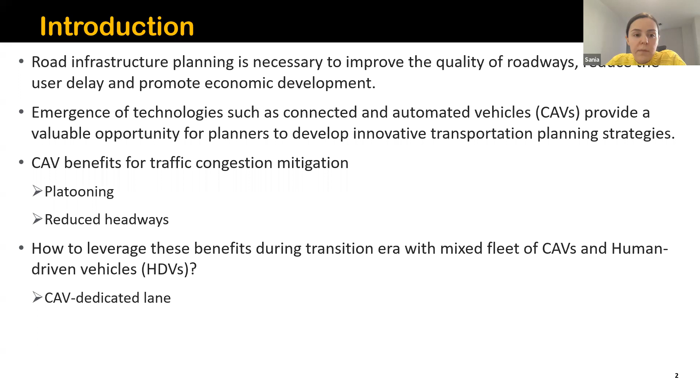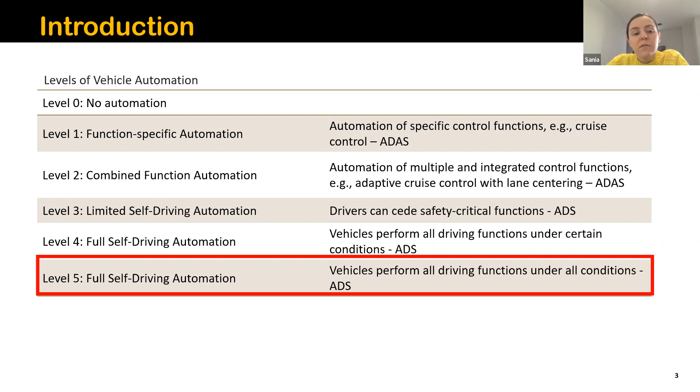According to the Society of Automotive Engineers, there are 6 levels of vehicle automation: level 0 with no automation to level 5 with full self-driving automation. The focus of this research is on the impact of CAVs on the design of transportation infrastructure, where there exist only HDVs and fully automated CAVs.

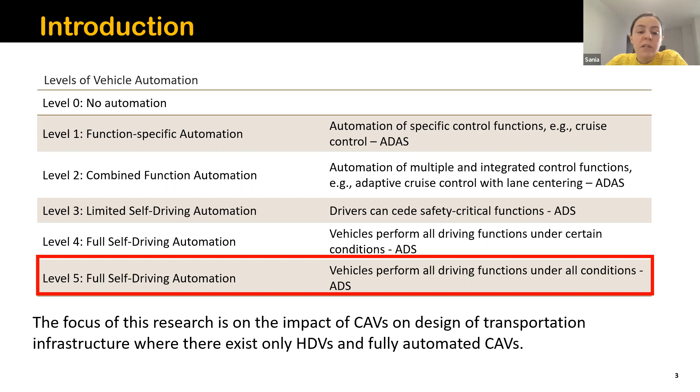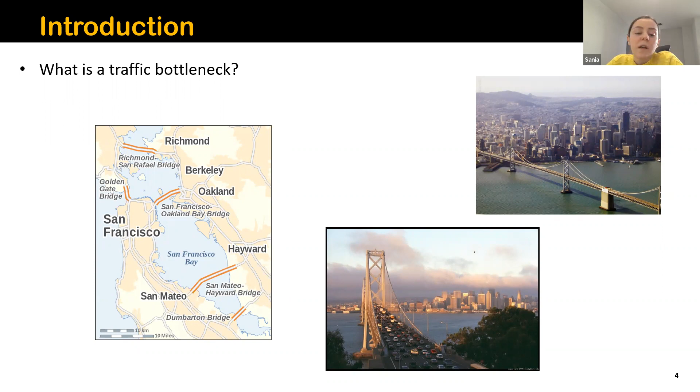So what is a traffic bottleneck? A traffic bottleneck is a localized disruption of vehicular traffic on a street, road, or highway. For example, at the San Francisco-Oakland Bay Bridge, people experience morning peak bottleneck congestion during the morning peak period as they travel from home to work.

This research aims to study the morning commute problem during the transition horizon with a mixed stream of CAVs and HDVs. In this problem, commuters pass a highway bottleneck during the morning peak period between a residential area and a workplace. The highway bottleneck includes multiple lanes categorized as CAV dedicated lanes, or CAVLs, and general purpose lanes, or GPLs. There are two groups of commuters: human driven vehicles, or HDVs, and connected and autonomous vehicles, or CAVs. The morning peak period is divided into T time intervals, and we are implementing a time-varying lane-specific tolling scheme during the morning peak period.

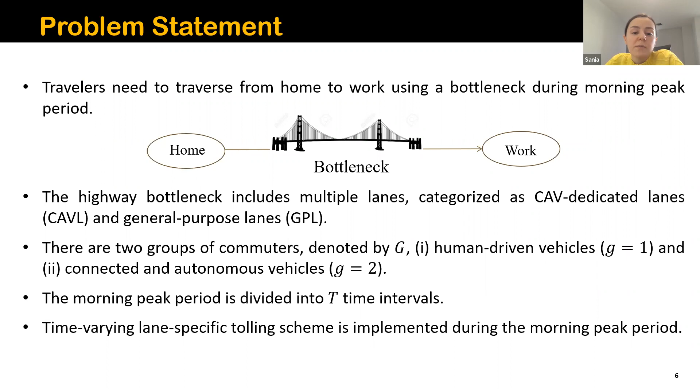So here is a list of research contributions.

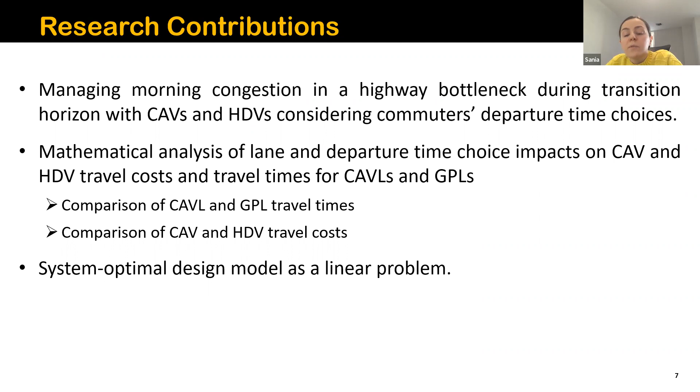First, the study aims to develop a framework for managing morning congestion in a highway bottleneck during the transition horizon with CAVs and HDVs, considering the commuters' departure time choices. We are mathematically analyzing lane and departure time choice impacts on CAV and HDV travel costs and travel times for CAV dedicated lanes and general purpose lanes. Finally, we have developed a system optimal design model as a linear problem to minimize the total system cost.

Here is a list of assumptions for this problem. We are assuming that CAV commuters have a lesser value of time compared to HDV commuters. The capacity of the CAV dedicated lane is assumed to be higher than that of general purpose lanes, due to the reduced headways between vehicles for CAVs. HDV commuters are only allowed to use general purpose lanes, but CAVs can use general purpose lanes and also CAV dedicated lanes.

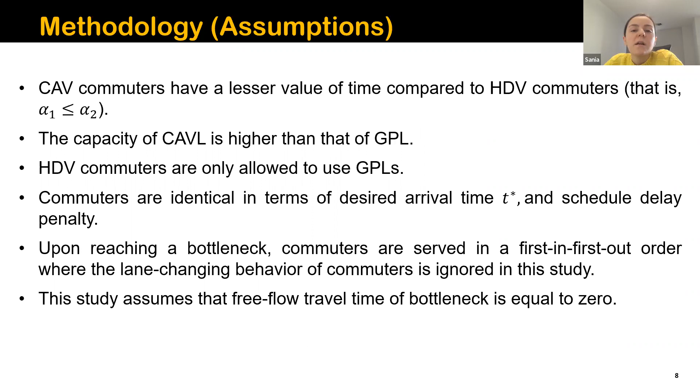Commuters are identical in terms of the desired arrival time and a schedule delay penalty. Upon reaching the bottleneck, commuters are served in a first in, first out order, where the lane changing behavior of commuters is not considered in this study. Also, we are assuming that the free flow travel time of the bottleneck is equal to zero, and therefore the travel time only consists of the queuing delay at the bottleneck.

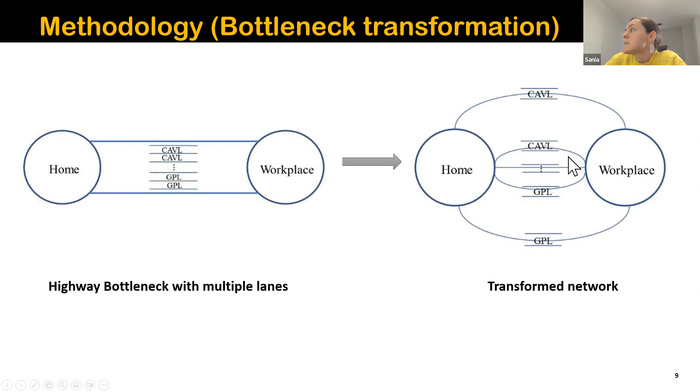Here you can see the highway bottleneck with multiple lanes. We have CAV dedicated lanes and general purpose lanes. We are transforming it into a network in which each of these lanes will link in this network between home and workplace.

The travel cost of commuters under CAV dedicated lane and tolling policies consists of a scheduled delay cost, travel time cost, and time varying lane specific toll.

Under the equilibrium conditions, CAV commuters cannot reduce their travel costs further by unilaterally changing their departure times and lanes. But for HDV commuters, they cannot reduce travel costs further by unilaterally changing only their departure times, because they can only use general purpose lanes and don't have a lane choice.

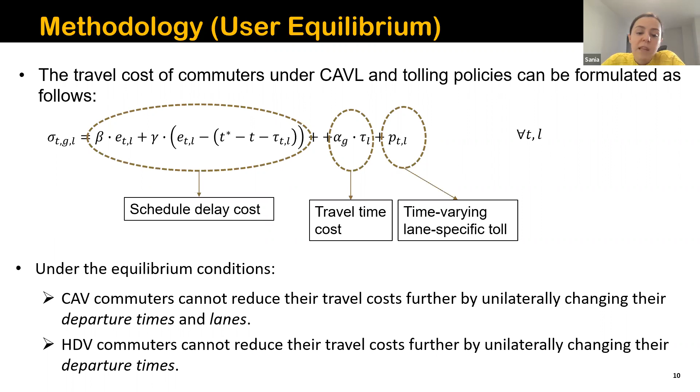The equilibrium conditions are formulated as a mixed linear complementarity problem. We have user equilibrium conditions for CAV and HDV commuters, used to capture the departure times of the commuters. We have CAV restriction for HDV commuters, meaning HDVs cannot use CAV dedicated lanes, queuing delay constraints to derive the travel times, and early arrival time constraints to evaluate the schedule delay penalty for the commuters, and finally travel demand conservation constraints.

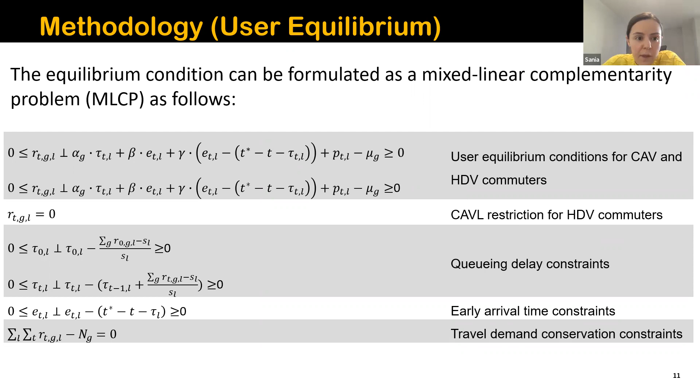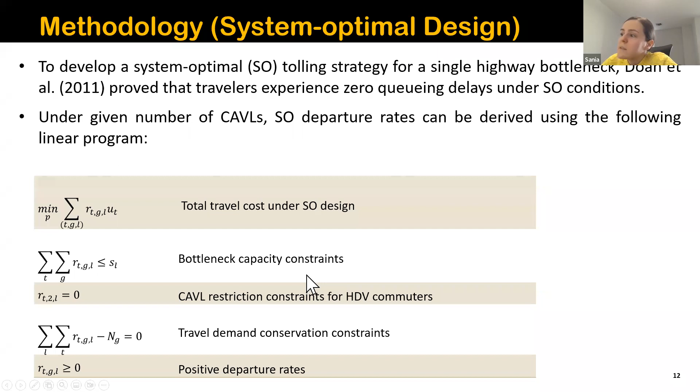To develop a system optimal tolling strategy for a single highway bottleneck, it is proven that travelers experience zero queuing delays under the system optimal conditions. Therefore, given a number of CAV dedicated lanes, system optimal departure rates can be derived using this linear program. We are minimizing the total travel cost under the system optimal design, subject to bottleneck capacity constraints, CAV restriction constraints for HDV commuters, travel demand conservation constraints, and positive departure rates. The Lagrangian multiplier of this constraint will give us the tolling scheme.

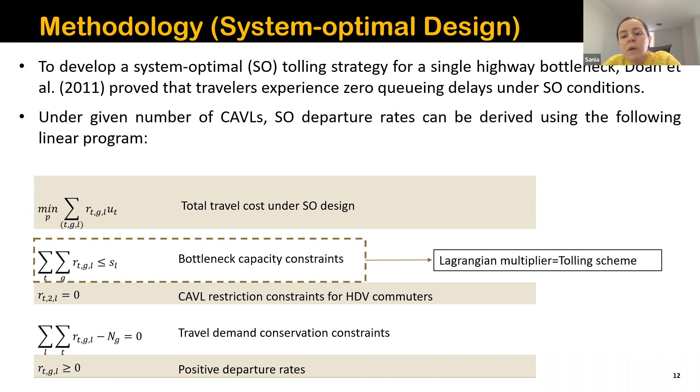After deriving the tolling scheme, we use an enumeration method to derive the optimal number of CAV dedicated lanes. Here is the enumeration method used to derive the optimal CAV and tolling strategy. In each iteration of this method, we determine the total travel cost, and a reduction in the total travel cost will convert one general purpose lane to a CAV dedicated lane.

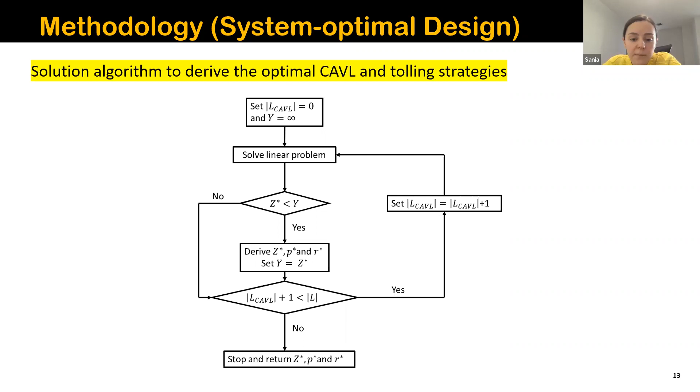In this section, we want to analyze the impacts of the number of CAV dedicated lanes and tolling strategies under different CAV market penetration rates on the total system cost, and also lane and departure time choices of the commuters. During the morning peak period, the CAV and HDV commuters will travel along the highway with 4 lanes, in which the total travel demand of commuters is assumed to be equal to 1,000. The morning peak period is divided into 100 time intervals, and the desired arrival time is the 70th time interval.

The capacities of the CAV dedicated lane and general purpose lanes are assumed to be equal to 30 and 10 vehicles per time interval. Early and late arrival penalties are assumed to be 0.8 and $4 per time interval for CAV and HDV commuters. Finally, we are assuming that the value of time for CAV and HDV is equal to $1 and $2 per time interval.

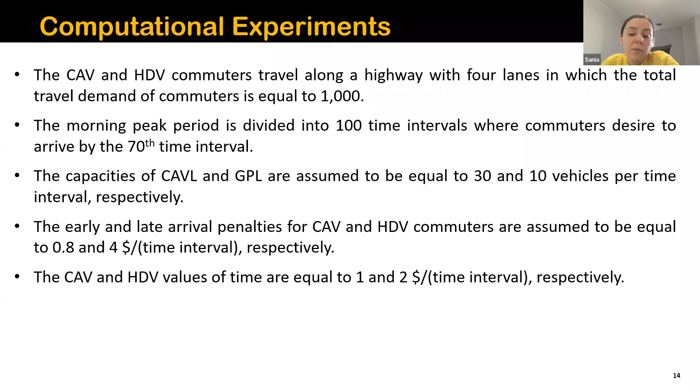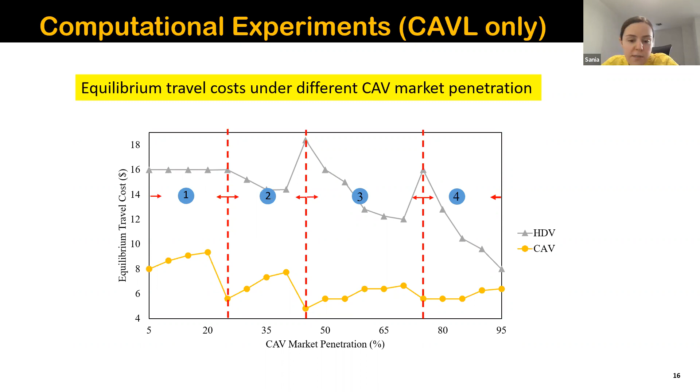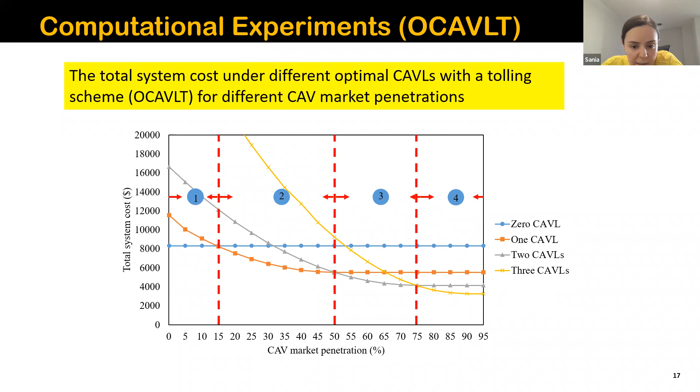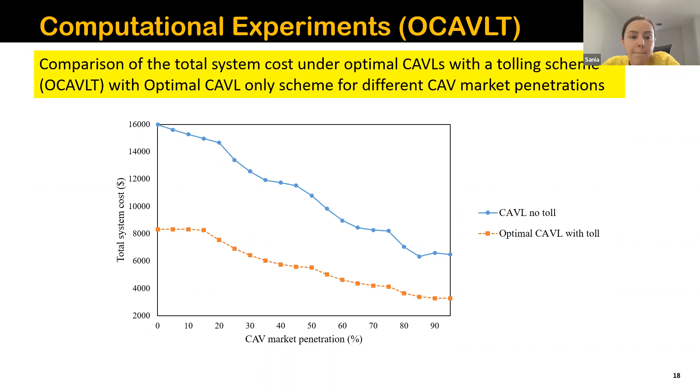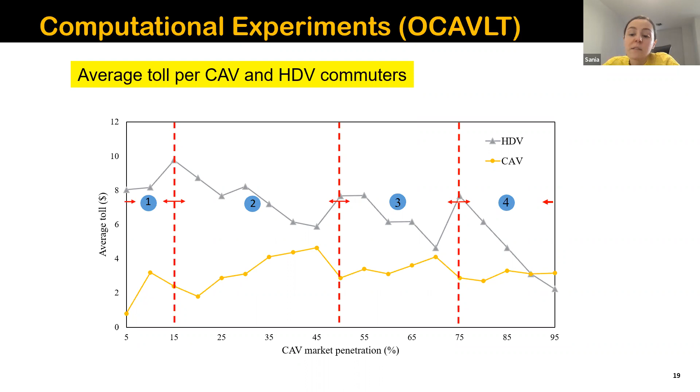Also, given the fact that we are assuming a constant travel demand, the total toll revenue collected by the agency is reduced as the CAV market penetration rate increases, and this shows the importance of exploring other resources for maintaining the transportation infrastructure in the CAV era.

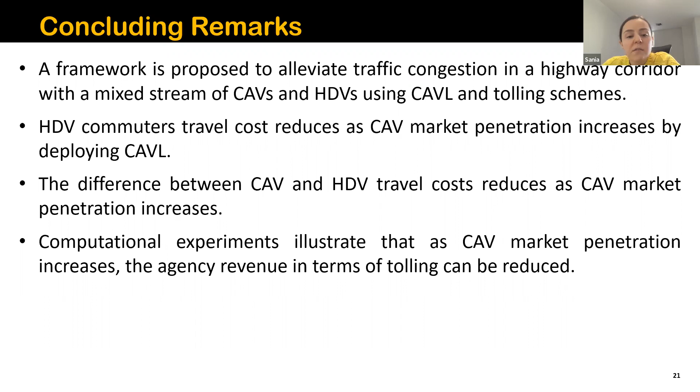In this research, we proposed a framework to alleviate traffic congestion in a highway corridor with a mixed stream of CAVs and HDVs using CAV dedicated lanes, and also considering a lane-specific time varying tolling scheme. We showed that HDV commuters' travel costs reduce as CAV market penetration increases by deploying CAV dedicated lanes, and that the difference between CAV and HDV travel costs reduces as CAV market penetration rate increases. Also, computational experiments showed that with increasing CAV market penetration, the agency revenue in terms of tolling can be reduced.

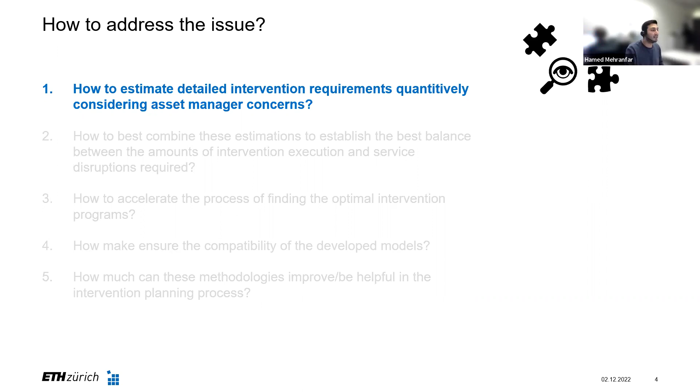So for example, for the case of bridges, we realized that there are different points in time when different decisions at different levels of detail are being made. For example, 15 years ahead of the execution time, they use their deterministic model to come up with a rough idea of what intervention activities are needed. Then 5 years later, they verify these intervention requirements with their inspectors, and then they can decide to send it for preliminary studies for execution.

So we realized that in the beginning, in the initial phases of this intervention planning process, something is missing. A systematic approach is needed here to help the bridge manager, or in general the asset manager, decide which kind of intervention activities are needed, with better accuracy and more level of detail.

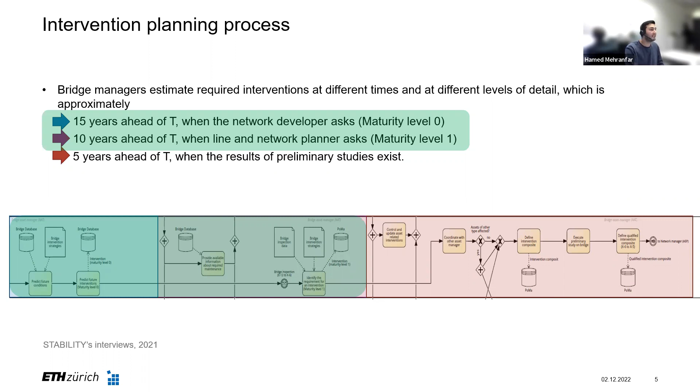So we proposed a probabilistic framework, and the reason is that currently they have these kinds of deterministic models and they use them, but they don't really rely on the results of these models because there is a lot of uncertainty associated with the deterioration processes and stuff like that.

So there are two ways to handle that. If you want to use your deterministic model, either you can just ignore these existing uncertainties, or you can use a lot of fancy modeling to consider all of these things. But there is a lot of assumption in that kind of modeling.

So we propose a probabilistic model, because although we cannot really specify which kind of uncertainty exists, with this probabilistic modeling we can incorporate the impact of these uncertainties into our predictions.

And we suggested that this framework should work on the component level. The reason is that we could go towards the element level, saying that, for example, we should focus on the rebars within the abutment and stuff like that, but there would be a lot of effort required to implement these things.

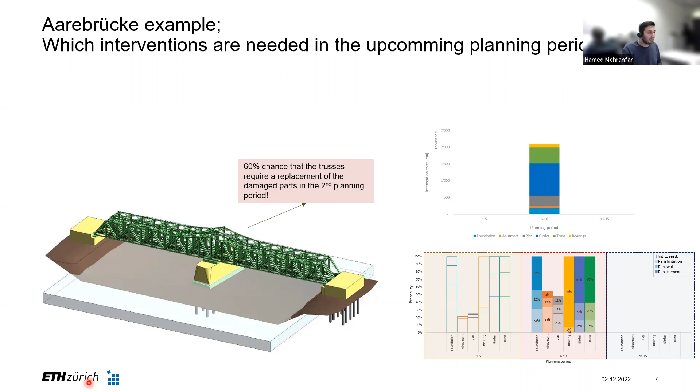This is a very general purpose methodology, so you can apply it for different kinds of assets, for example tracks, roads, and this kind of stuff. You can also consider the life cycle of the asset, and the failure risk connected to the condition state of the components.

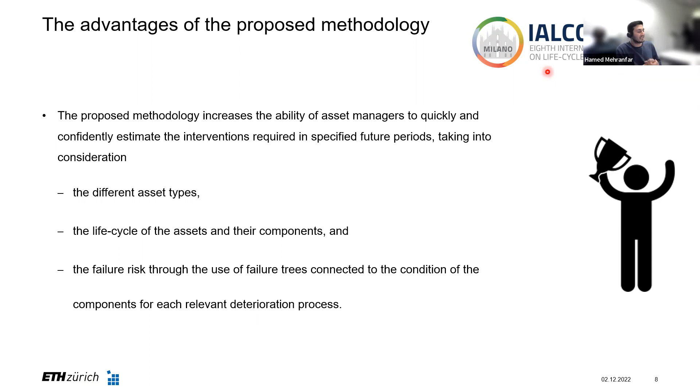Next year we will present this work at the IALCC conference in Milan, and I'm looking forward to that.

After knowing what kind of intervention activity is needed, by predicting that, the next step is how to combine these intervention activities. Consider it like pieces of a puzzle: you found these pieces, but it's important how you put them together. You can put them randomly and get a very bad picture, but in order to get that perfect picture, you need to find the best way to put them together.

This is important because right now, for example, in a line, they close some part of the line and do some maintenance activities there, and it takes like a month or something. Then 2-3 months later, they go and do some other part on another part of the line. If you look at the big picture over 5 years, you have like 6 months of closure at different times.

So here the idea is that if there is this kind of intervention requirement in different parts of the same network, you can take advantage of the closure of one part and execute intervention in the other part, so that in total you have less disruption to the service.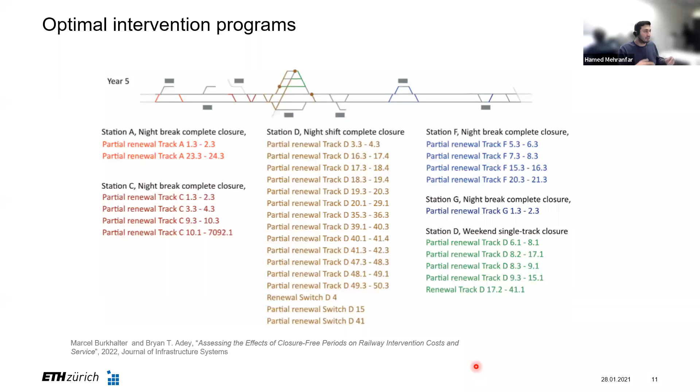So I mentioned we have this mixed integer linear program, and there is one big issue with this kind of exact approach: if you work on a small example, it can solve the problem in a reasonable time. But if you want to apply this methodology on a large scale network, like the dense railway system in Switzerland, it might take a lot of time. So one way is to use a heuristic approach, which is fast, but there's a danger that you might get a local optimal solution.

So we didn't want to use this kind of heuristic approach. Instead, we tried decomposition techniques to accelerate the solution process, and we show that it can accelerate the process by 20 to 30%. It might not look like much, but if you need to run your program for a week, it can save you up to 2 days.

So it is good. We sent the results of this work to the Journal of Infrastructure Systems, and we are waiting for a response. Hopefully it gets through.

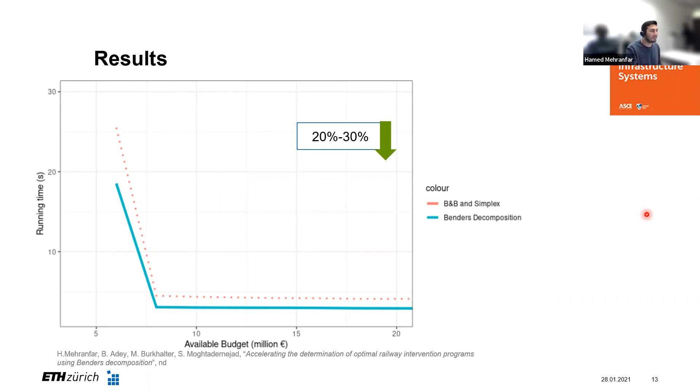So these three questions were the ones that, for the moment, I got answers for, and I worked on those during my time. In the remaining time, I am going to be working on answering two more questions.

The next would be how to make sure there's compatibility between these kinds of models. This is important because if you want to present this to an asset manager, they want to just click and see everything there. There's a bit of an issue here: for example, I use R, my colleague Steve uses Python. So we need one integrated place to see this workflow of information from different databases, using different levels of detail.

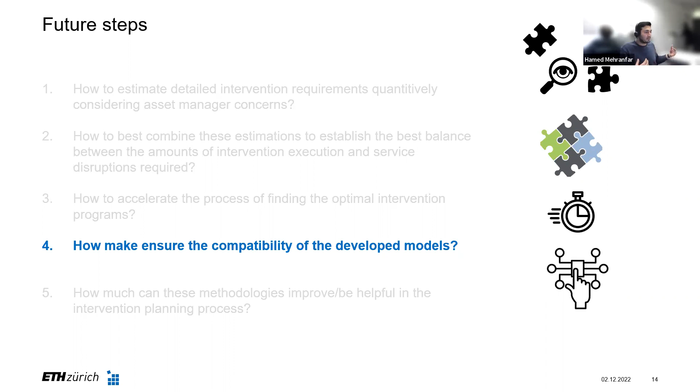So we thought that maybe BIM modeling is a very good environment to show this kind of workflow and see the final result there. It can give a very good overview of intervention activities and evolution of condition state over time for asset managers.

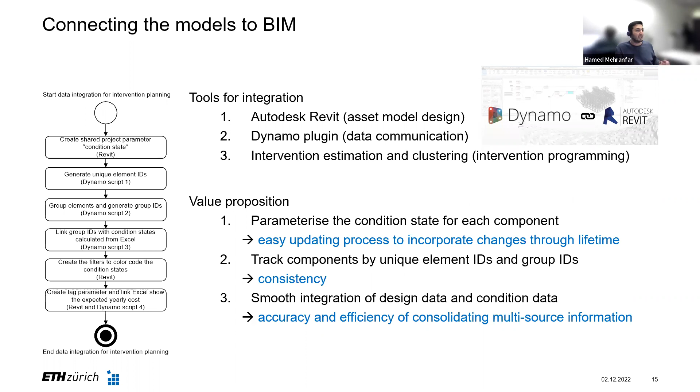And the last part is seeing how this methodology can improve the current intervention planning process. It's a work that Steve and I will be working on. We will use process modeling to see how much implementation of this methodology can improve the overall process.

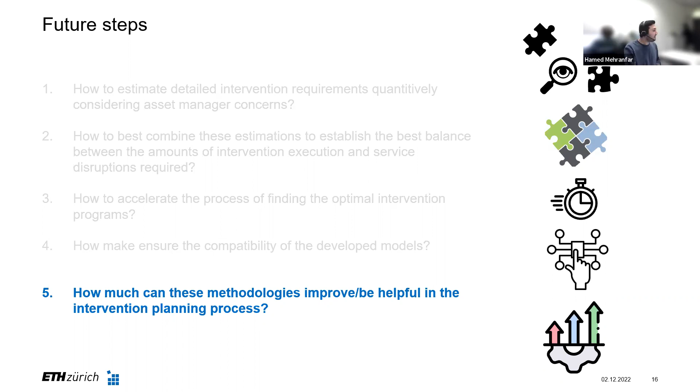This was basically part of the work we do in our group at the Institute of Construction and Infrastructure Management. I'm working mostly with Saviz and Steve here, and we have a bunch of other directions we work on, for example, cost modeling, cycling infrastructure, future development of infrastructure, and this kind of stuff.